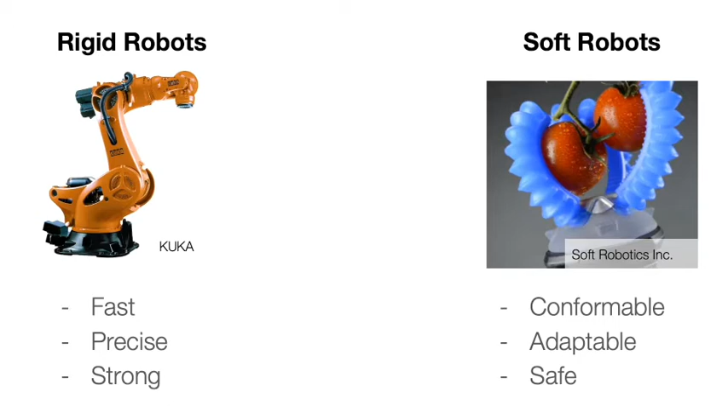Rigid robots are fast, precise, and strong, and soft robots are conformable, adaptable, and safe. We can achieve the best of both worlds using variable stiffness. There are many different ways to achieve that, but in this case, we're going to be focusing on jamming.

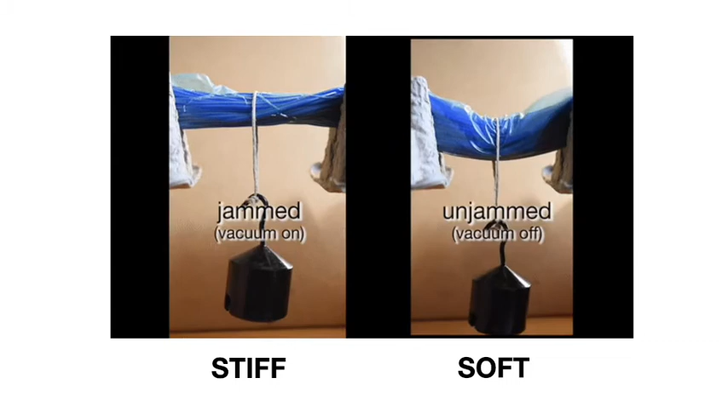What is jamming? We're focusing on fiber jamming, so we'll take a pile of fibers, put it in an airtight envelope, and attach it to a vacuum. Let's see what happens. On the left-hand side, you're seeing it with the vacuum on, and on the right-hand side, with the vacuum off. When you turn the vacuum on, you create a pressure differential between the inside and outside of the bag, squeezing these fibers together, increasing the kinematic and frictional coupling between the fibers, and changing the mechanical properties, particularly the stiffness.

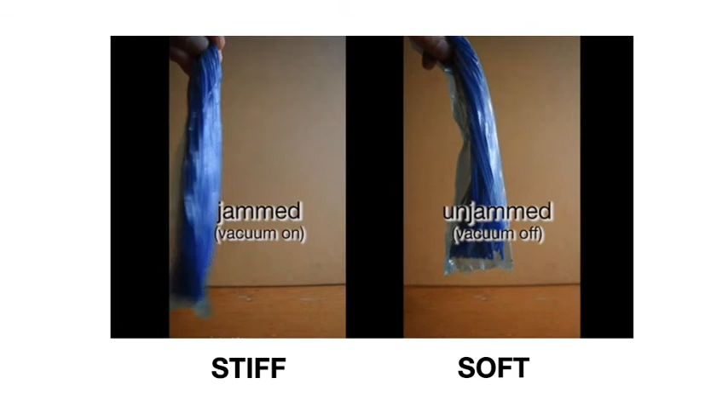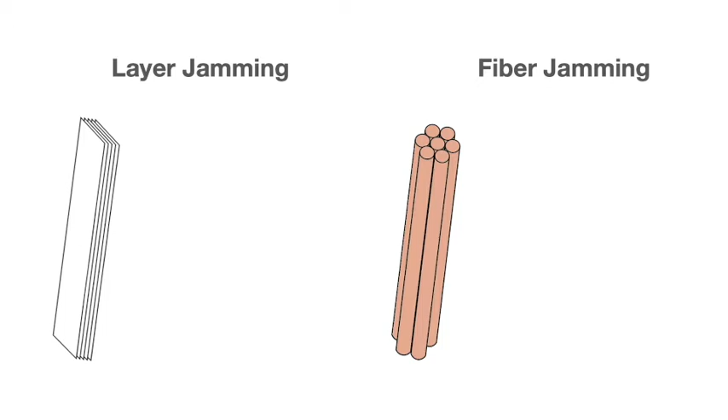So now we have a tunable bending stiffness element. There are different ways to achieve that through jamming. There's also layer jamming, which has been studied much more often. Why are we looking at fiber jamming particularly? Because it has unique advantages, namely tunable bending stiffness in multiple directions, which is much more useful for applications such as endoscopes and manipulators when forces come from multiple directions. Whereas for layer jamming, unfortunately, we have tunable bending stiffness in only one particular direction.

Why am I saying unfortunately? It's because layer jamming has some great advantages that fiber jamming right now does not have. One is its reliable and repeatable behavior. These two animations show that behavior. On the left-hand side, the layers just slide with respect to each other - that's the only motion. But on the right-hand side, when you're bending the fibers, they roll around each other and rearrange themselves, changing the overall cross-sectional area and therefore the overall bending stiffness of these structures. So fiber jamming with circular cross-sections really does not provide repeatable and reliable behavior.

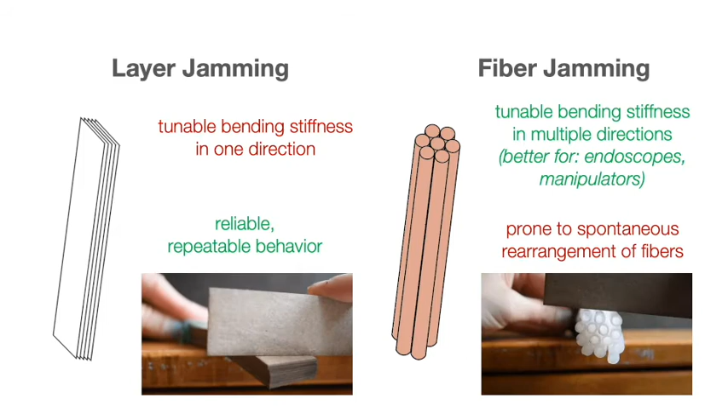Related to that is modelability. Because I know where the layers are with respect to each other at all times - they're not randomly rearranging - I can come up with pretty straightforward theoretical models of the stiffness behavior of layer jamming structures. Whereas this is not as easy for fibers, because the contacts between the fibers are lines that are constantly twisting, turning, and moving, making it much harder to model.

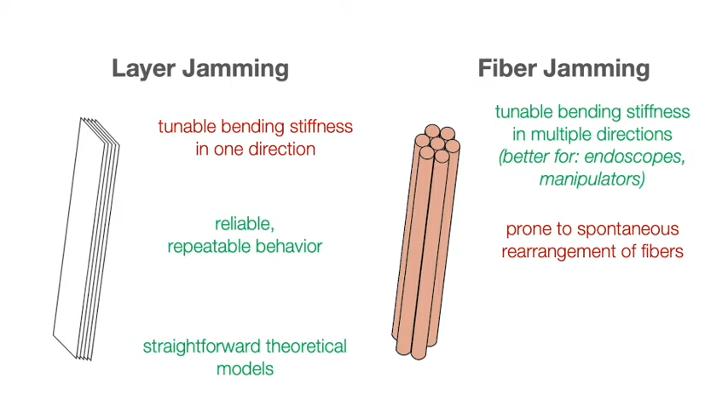To address this trade-off, we're proposing square fibers. It's the same thing as fiber jamming, but instead of circular cross-section, we're taking fibers with square cross-section, putting them in an airtight envelope, and attaching it to a vacuum. What are the unique advantages?

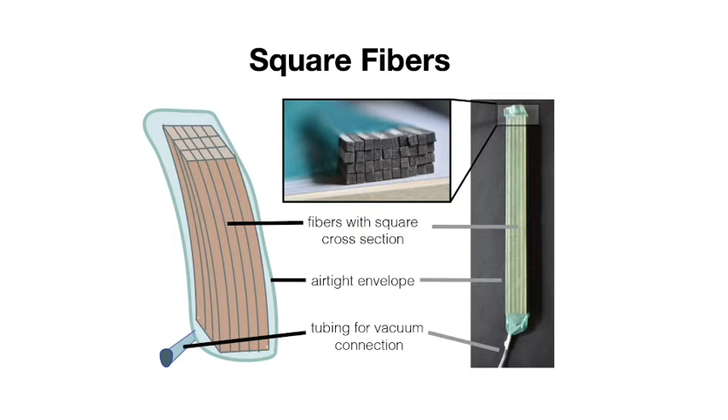The square fibers create kinematic constraints due to their geometry. You can see here that they're no longer rolling around with respect to each other, and the contact surfaces between them stay pretty constant. This allows us to have much more repeatable and reliable behavior.

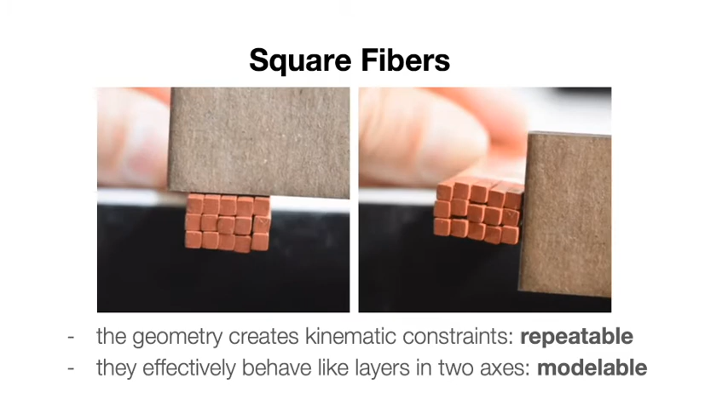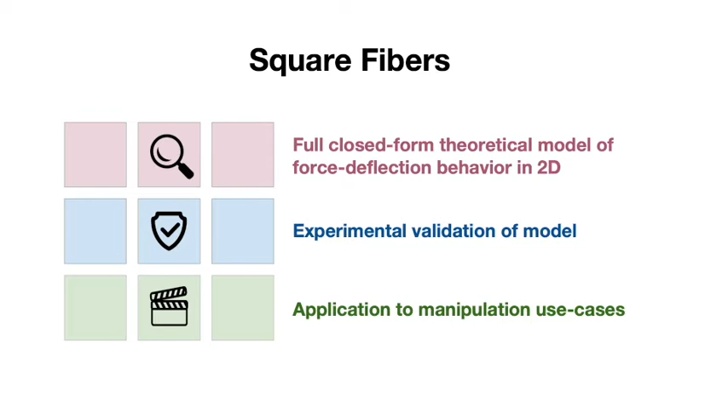That's why in this study, we're going to provide a full closed-form theoretical model of the force deflection behavior of these structures in different directions. We're going to experimentally validate this model, and finally apply it to a manipulation use case - in this case, an endoscope. So let's start with the model.

What do I want from the model? In the middle, you're seeing a head-on view of a square fiber jamming structure with many red arrows. No matter which direction that red arrow is pointing, I want to know what my force deflection behavior is going to be. In particular, I want to know the force I need to apply per a given deflection. That's the stiffness behavior, and according to Euler-Bernoulli beam theory, that scales with material properties and geometric properties.

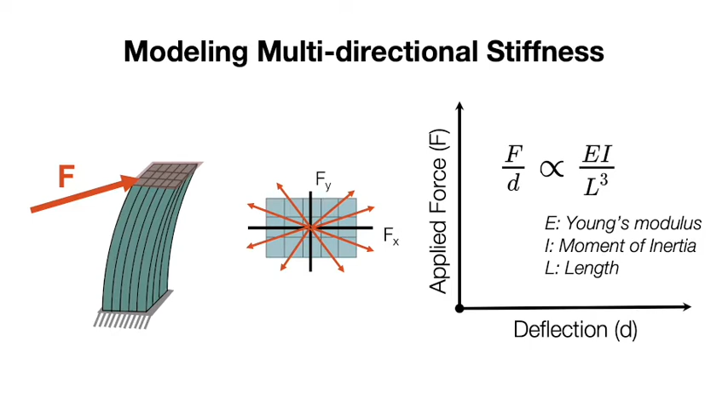In this case, the material property is Young's modulus, and the geometric properties are the moment of inertia and the length. In this study, we're particularly going to look into moment of inertia because we're interested in how the number of square fibers and the dimension of these fibers affect the stiffness behavior.

Let's start with the unjammed stiffness. When the structure is unjammed, we're assuming that all the fibers are completely independent of each other. In this case, we're looking at a 3x5 array. It looks like we have 15 different fibers just bending together. So the moment of inertia in this case is just going to be 15 times whatever the moment of inertia is for a single fiber.

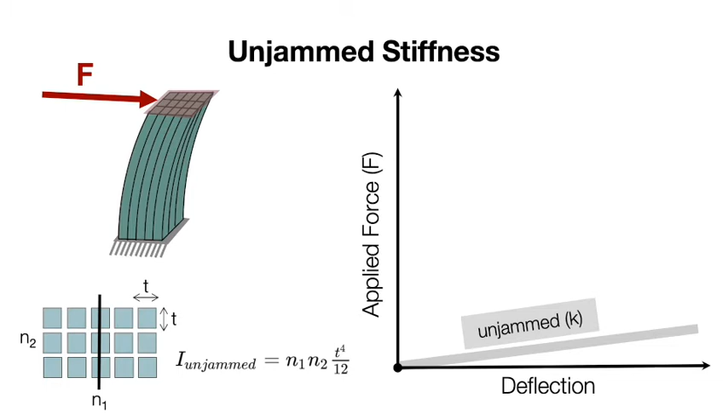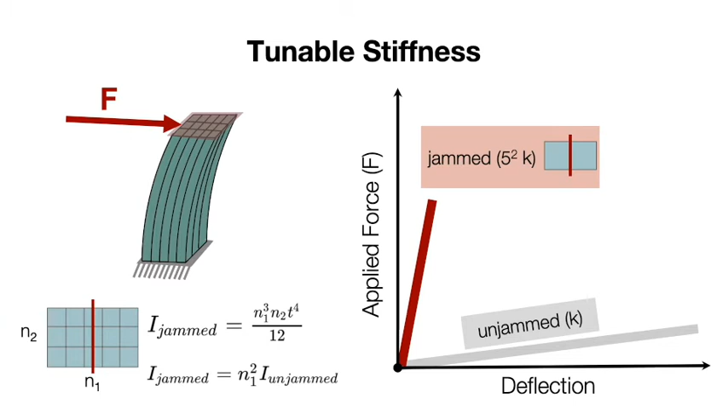That leads to an overall low stiffness compared to when we jam it. Because when we jam it, we look at it as one continuous rectangular beam, and now we're bending it about the axes where I have 5 fibers. So the dimension with the N1, the 5, is going to dominate in this case. It'll be 5 squared times the original, so it'll be 25 times stiffer than the unjammed state when I'm pushing it in this particular direction.

Now let's push in the complete orthogonal direction, shown by the yellow arrow here. Now I'm bending it about the axes where I had 3 fibers, so in this case the 3 will be dominating the moment of inertia equation. It'll be 3 squared times the original, so it'll be 9 times stiffer than the unjammed stiffness.

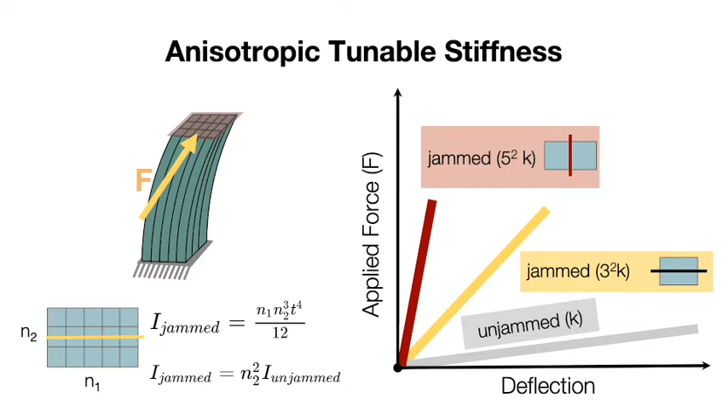So far I only showed the two orthogonal directions because they're easier to show, but we can have a full model with all the different angles and how that changes throughout the regime. You can see the maximum stiffness happens when you're bending about the longest axes, and the minimum stiffness happens when you're bending about the shortest axes.

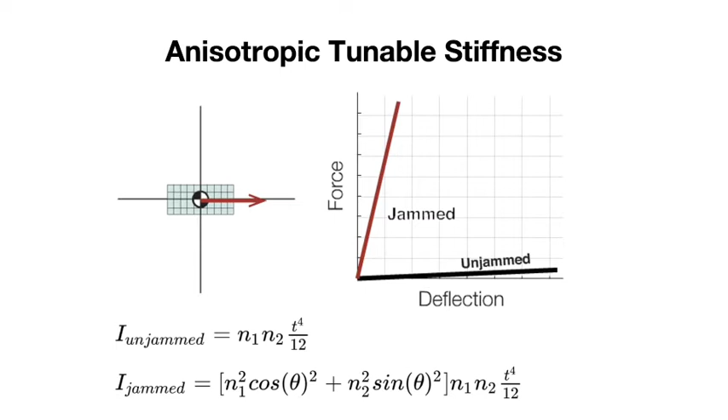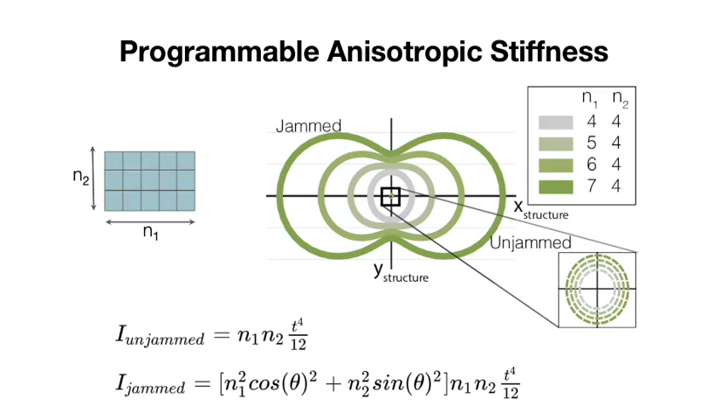So now we looked at the jammed stiffness versus the unjammed stiffness. But is that the full picture? Will that give me the full force deflection behavior? No, there's actually a little bit more.

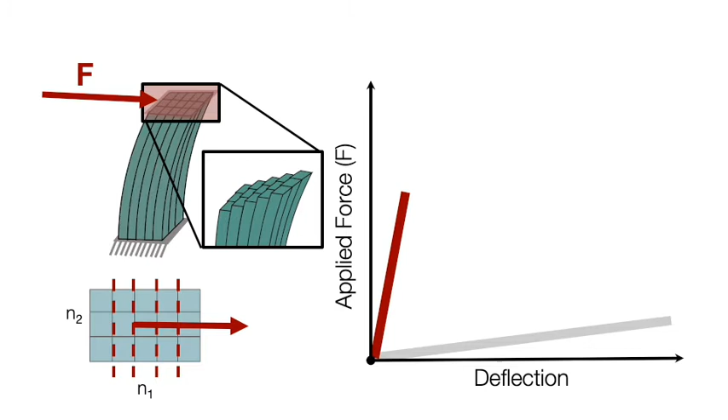If I keep pushing on these structures, at one point, these dotted lines I've shown here in red will start slipping. The tip of the structure will start slipping about these four separate surfaces. This will happen when the shear force in the beam is able to exceed the frictional force between the fibers. After that, we're going to treat it as if there are 5 separate rectangles, because now they're freely sliding with respect to each other, so I have a much less stiff slope after that particular point.

Let's try pushing it in the other direction now. Along the axes where I have 3 fibers, I had an overall low stiffness initially to begin with, and then it'll eventually slip along those 2 surfaces, and then it'll behave like 3 rectangles, again having an overall lower stiffness after the slip point.

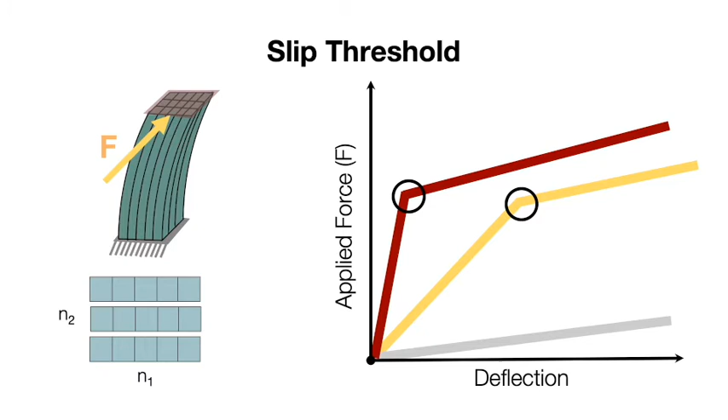Here what I'm interested in is the slip threshold, so I need to find the point at which I'm able to exceed the frictional force, and then I also need to know what my post-slip stiffness is, so that I have the full force deflection behavior. Let's start by looking at the slip threshold.

Now we're looking at a fiber jamming structure head-on in the XY force space, and I'm pushing it only in the X direction where I have only 5 fibers. The blue line shows the force threshold, and before it, it's continuous, and after I cross that threshold, it's going to start slipping along those blue planes.

This line is governed by this particular equation: 2/3 mu PA. Mu is the coefficient of friction, and P is the vacuum pressure. So mu times P is the shear stress in the beam that I should not exceed at all if I do not want my fibers to slip.

The A is the cross-sectional area, and we need that because the shear stress is distributed along the entire cross-section. And the other thing is the 2/3. That comes from the fact that shear stress is not distributed equally throughout the beam - it'll be much higher in the middle of the beam compared to the edges where it's 0.

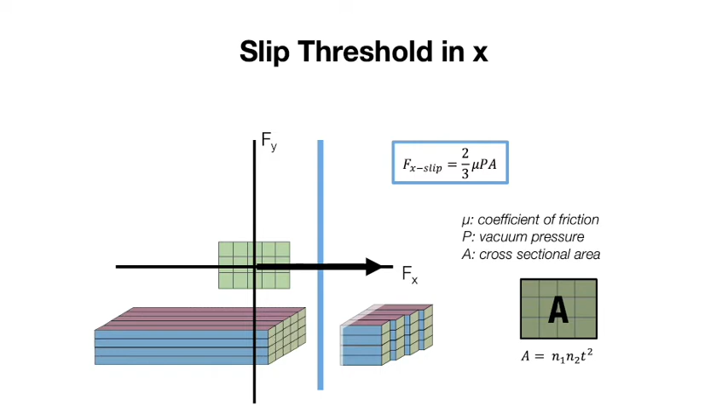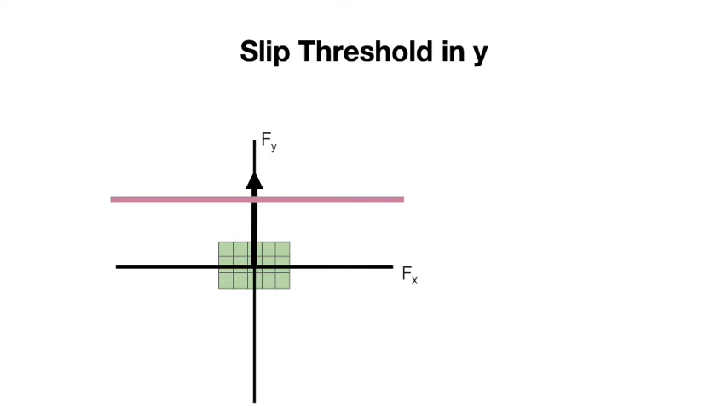Now let's push in the complete other direction, about the axis where I only have 3 fibers. I've shown it with a pink line. Before the pink line, everything will be cohesive. After the pink line, the pink surfaces will start slipping. This line will be governed by the same exact equation, because the coefficient of friction and the pressure does not change with direction, and the cross-sectional area does not change.

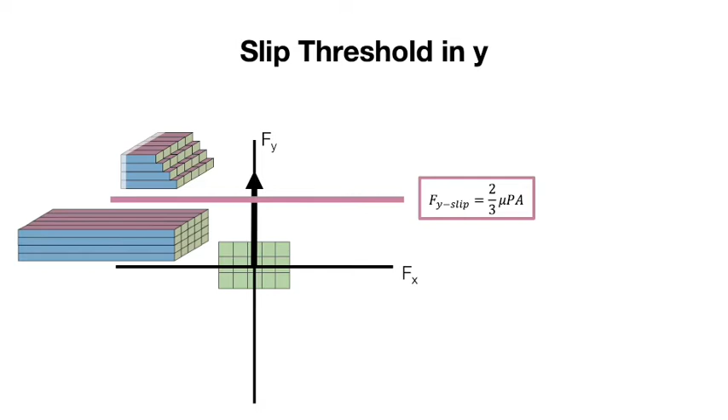So then we can see that it's a square, and the slip thresholds are not direction variant, which is an interesting thing to point out, even if our structure was very rectangular.

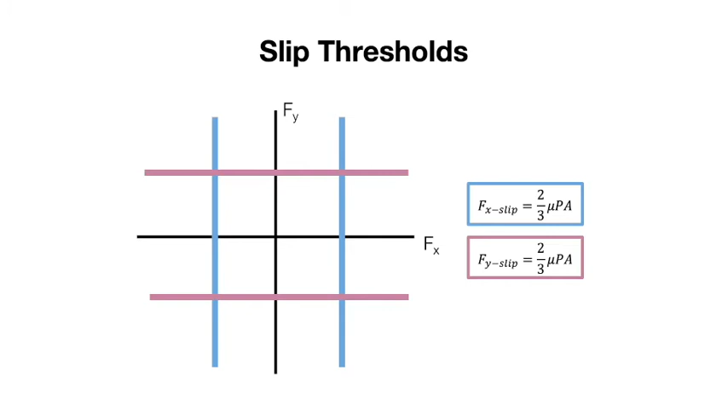So far we've only pushed in the X and the Y direction. Let's see what happens when we push in a direction where we're off axis. In particular, we're looking at about 60 degrees from the x-axis.

First everything is cohesive. Then we cross the pink line, the pink surfaces start to slip. Finally, we cross the blue line and the blue surfaces start to slip. So we have 2 distinct points of slip compared to layer jamming where you only have 1 point of slip - that's one unique thing about square fiber jamming structures.

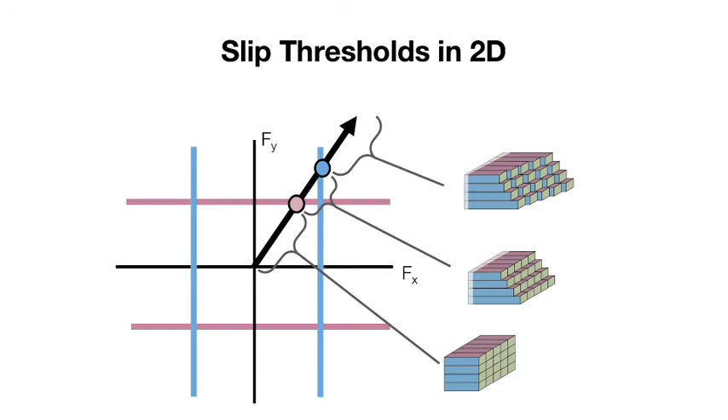Using this 2D force space, now that I know all of the force thresholds, all the slip thresholds, I want to make sure that this entire force area has defined stiffness values.

Let's start with the middle - that's the jam stiffness, before the structure has slipped at all. We had defined that with this equation that corresponded to the peanuts, the stiffness ellipses.

The corners are going to be when both axes are slipped, so that's going to correspond to the unjammed stiffness because now they're all free from each other. We hadn't yet defined the other corners, but those are pretty easy to define too because they're just rectangular shapes that are completely separate.

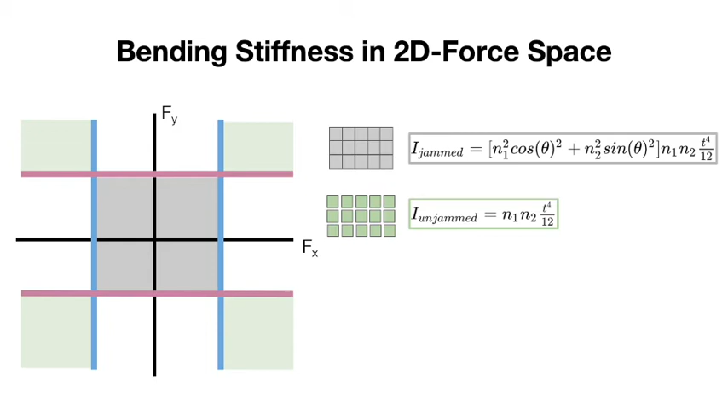For the blue edge, in this case, we'll treat it as 5 separate rectangles. And for the pink case, we'll treat it as 3 separate rectangles after those pink surfaces have started to slip.

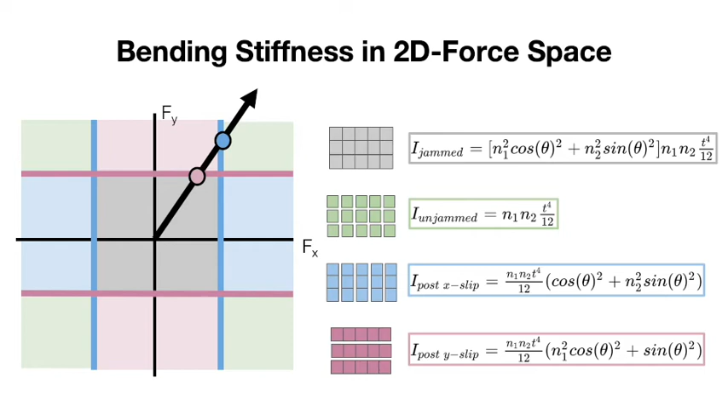If you're pushing only in the X direction, Y will never slip. If you're pushing only in the Y direction, your X direction will never slip. And if you're pushing 45 degrees between X and Y, they will slip simultaneously at the same time.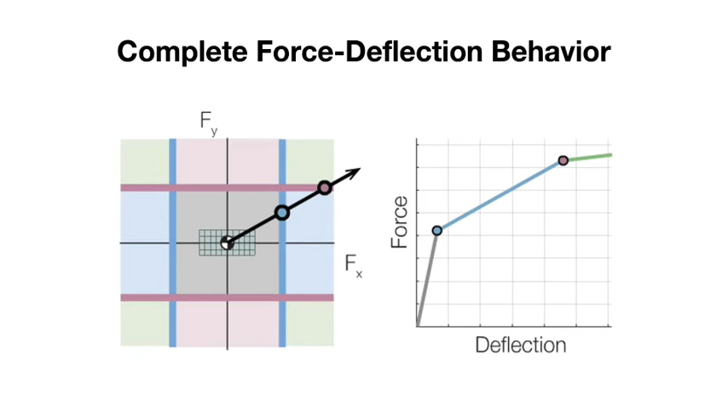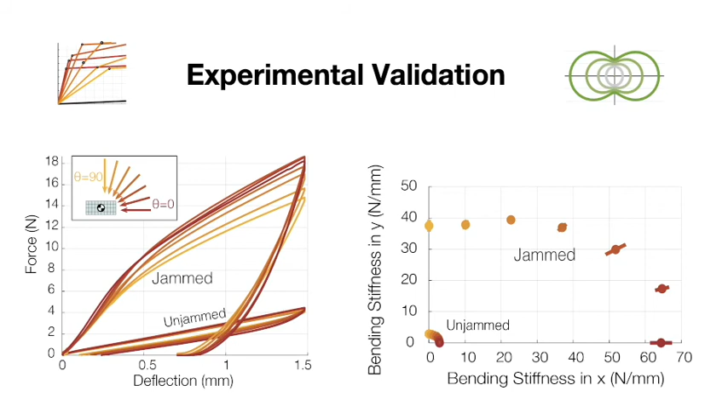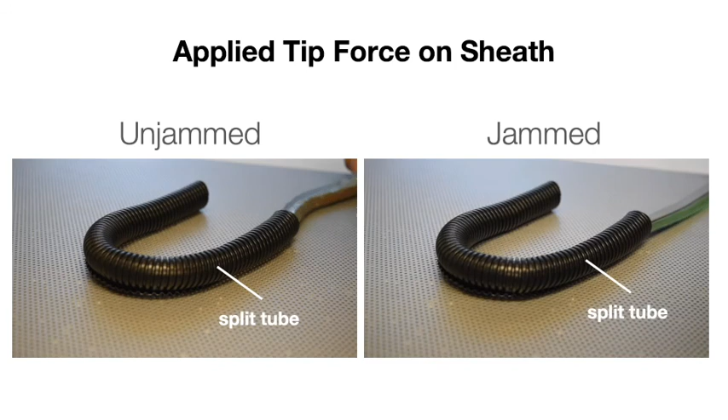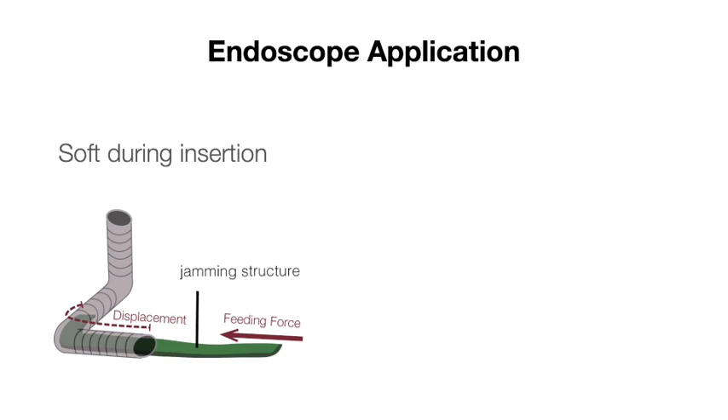So this is an application to show, and one particular application that could be useful is an endoscope. When you're using an endoscope, you want to be soft during insertion - when you're going through windy paths of the body, you want to conform without exceeding certain forces or putting too much force on the tissues you're going through. Then finally, when you're where you need to be, you want to be stiff in a particular direction to execute your task.

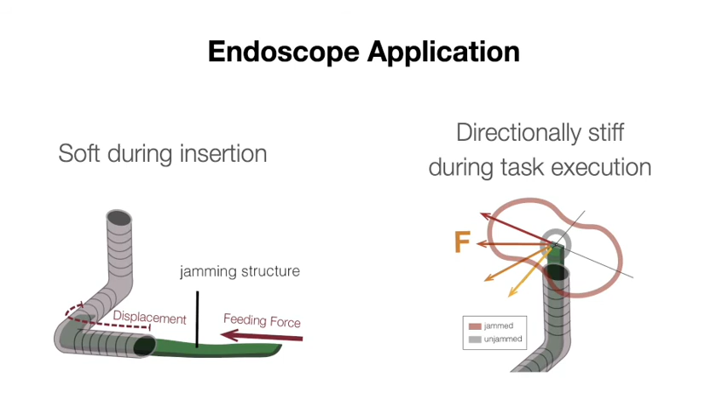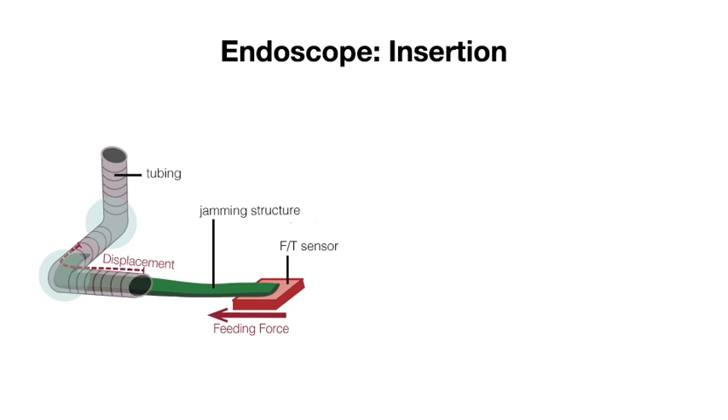Let's start with the insertion component. In this experiment, we had a tubing with bending in 2 different directions, and we put in a square fiber jamming structure and fed it in with a sensor, measuring our feeding force.

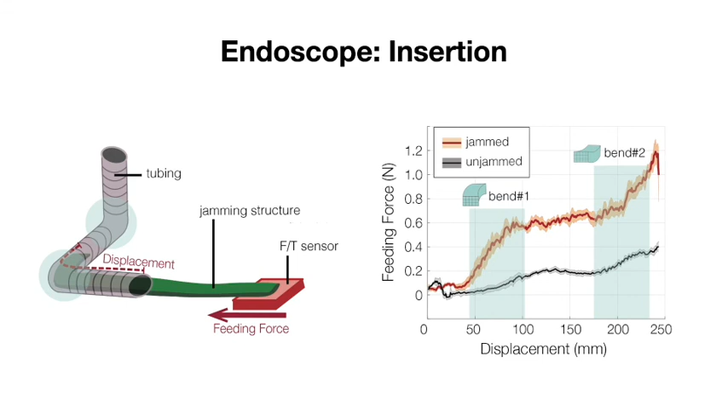So now I've completed my path, I'm where I need to be, and I want to make sure I can tune my stiffness the way I want. The way we experimentally tested this was to pull on this structure from different directions with an equal weight and see how much it deflected.

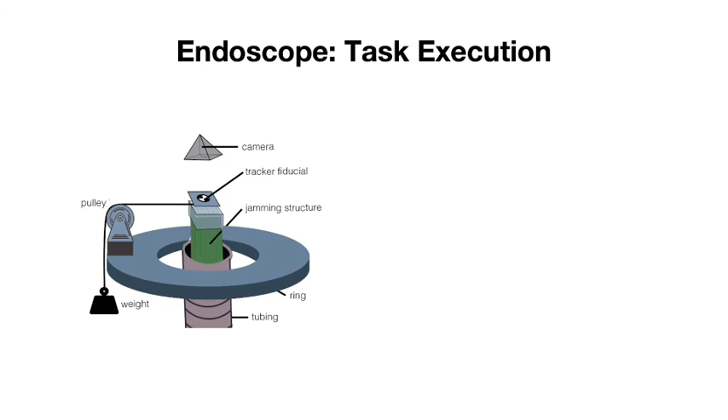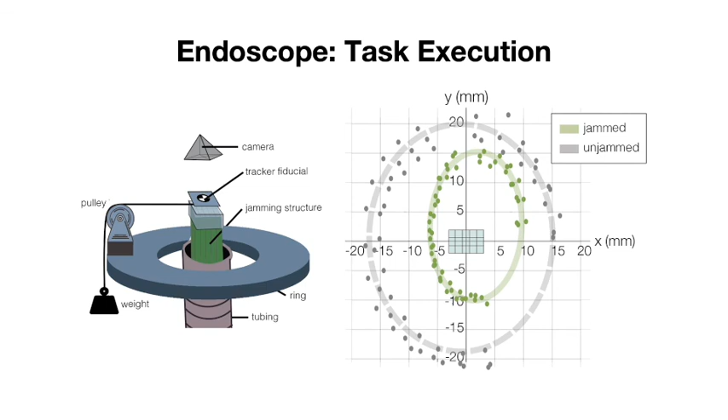So now I have this endoscope that can be unjammed when going to its path, and once there, can be stiff in a particular direction given the task I want to complete. Overall in this study, we propose a new structure that has tunable direction-variant stiffness. We provide a theoretical model of the mechanical behavior of these structures, experimentally validate the model, and finally apply it to an endoscope use case scenario.